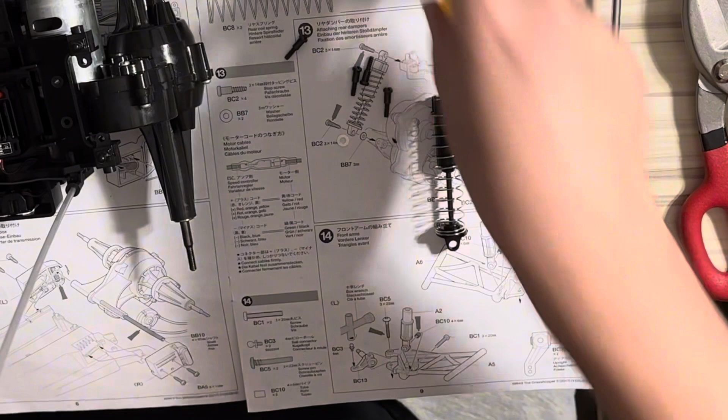Okay, that's one rear damper. Same thing, make sure you line up the hole. All right, that's two rear dampers.

Next step is you are going to take 4 of these BC2s. You're going to put them on the top and the bottom. The top is going to screw in right here, and the bottom screws in right here.

Now you're supposed to have 2 of these BB7 3mm washers. I could only find one, I must have lost one, so hopefully I'll be good going without it. I'll show you, make sure you grease these up. That was very heavy, but I'm making it work.

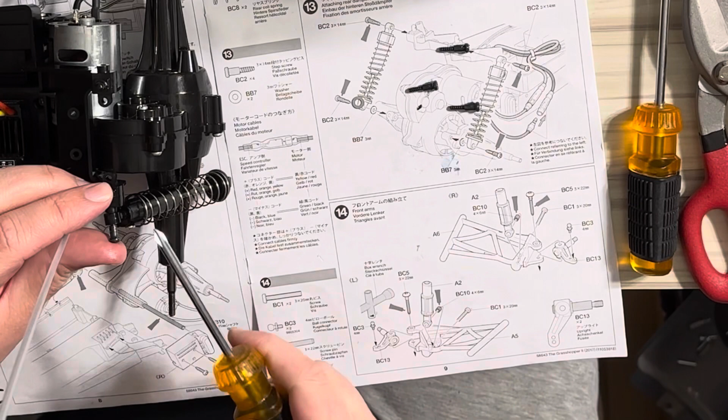Oh, and I did find the little straw for my antenna. Is it necessary? No. But it's part of the original and the charm and all that, so I feel like I want it on there.

Okay, got that side taken care of.

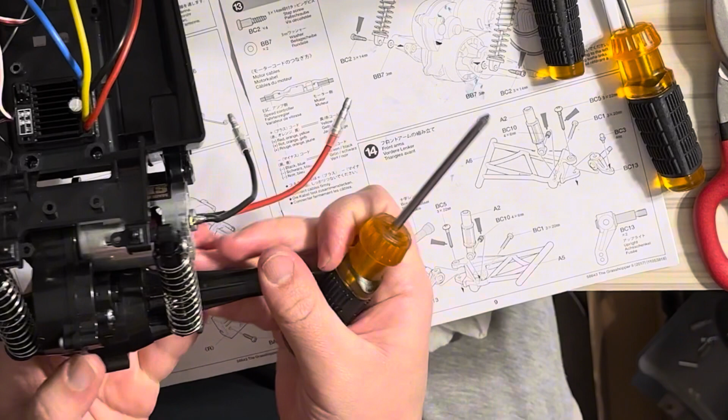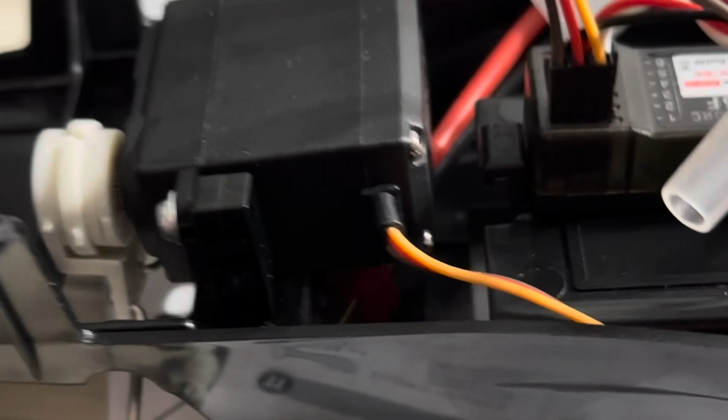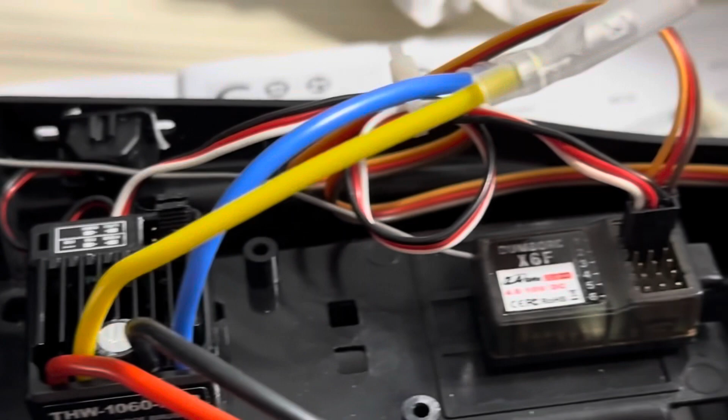Let's just admire for a minute how far we've come. Got a lot going on in here. Again, cable management's not my best, not my cup of tea, but got the rear dampers on, got the sport tune motor in there, got the ESC and the Dumbo RC receiver, got my servo mounted up. We're making progress, you know.

Next up is the front arm. So the next part of the build is the front arms. We will move on to step 14.

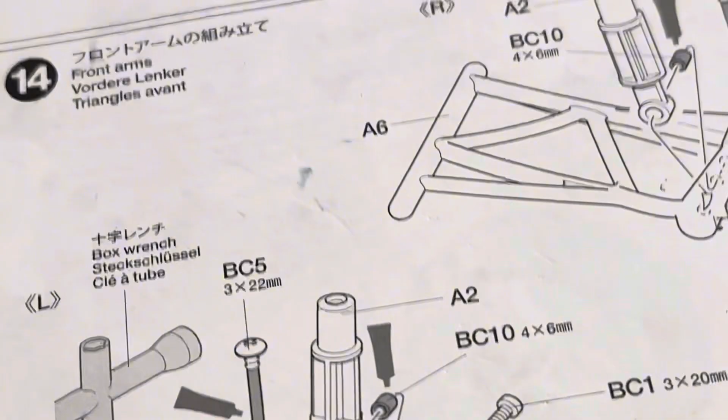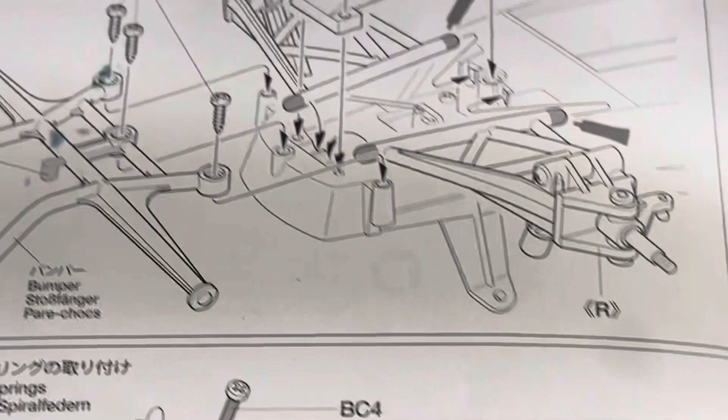And probably step 15, attaching the bumper, and then attaching the front shocks. After that is the wheel assembly, and we're going to attach the wheels, both front and rear. And then let's connect the battery. What do you know, that's all that's left outside of doing any steering adjustment on the front tires, building and painting the driver, and doing the decals on the body.